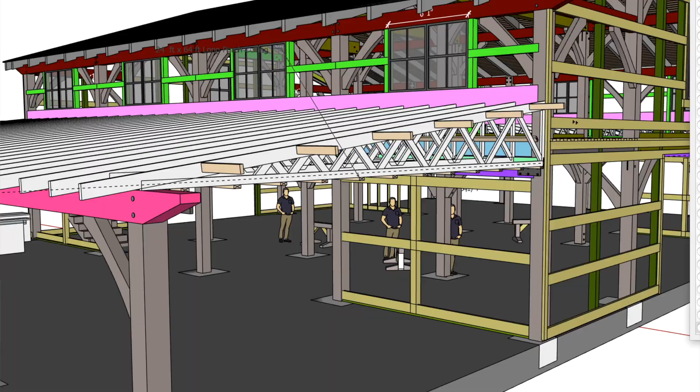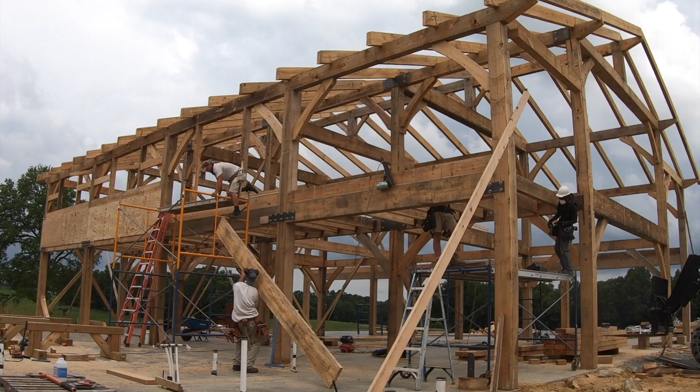Welcome back. We're at the Wedding Barn, and today we are finishing up our loft floor joist framing and working on this window wall so that we can set our trusses next week. If all goes well, we'll be able to set these trusses next week and get a roof on here soon, which we have been looking forward to for 6 weeks now. That's going to be critical. Here we go. Something to be stoked about.

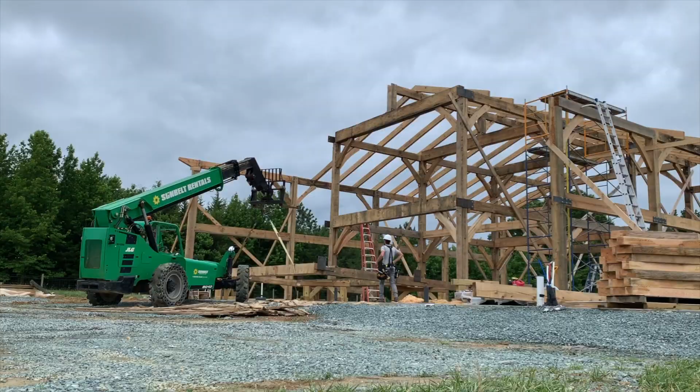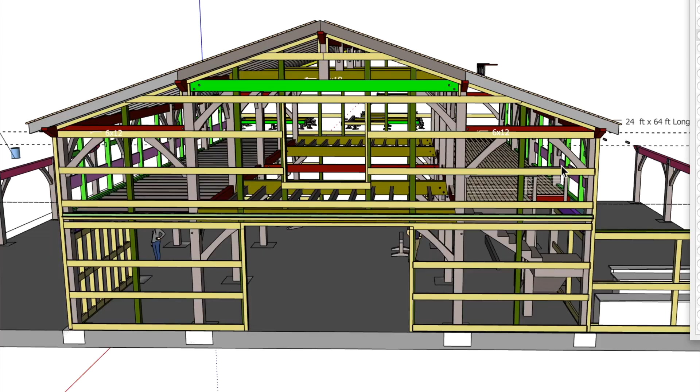So in order to frame this window wall, we've got a bunch of different layers that we got to put on here. So Ben and Blada are working on the floor joist system that the window wall framing sits on top of. And once we have the floor joists in, we can put a 2x6, dimensional 2x6, 1.5 by 5.5 dressed piece of lumber down on top of the floor joist that's going to simulate the tongue and groove decking that's going to go as the finished floor on top of these rough sawn 4x10 floor joists, which we can't put in yet because there's no roof and it cannot get wet.

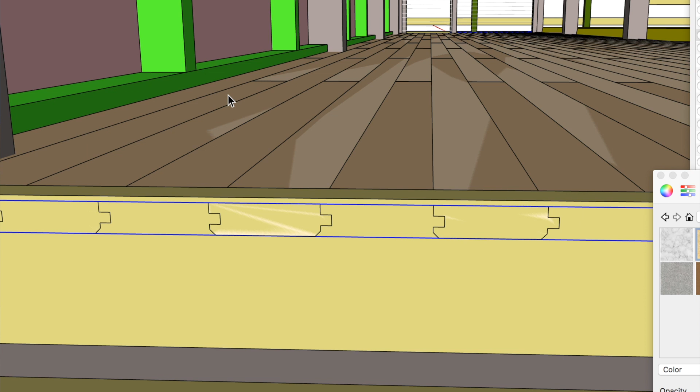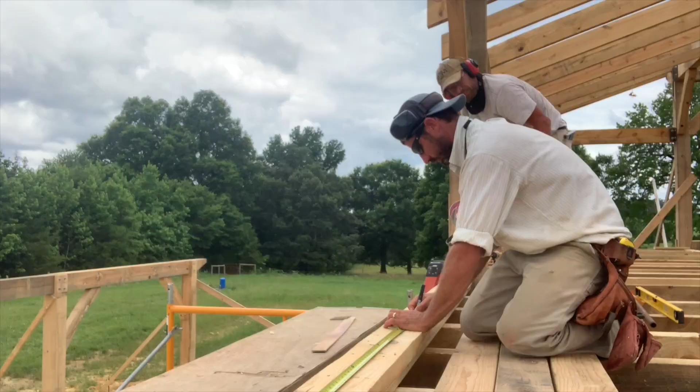And then on top of that is a nominal 2x6 rough sawn 2x6 that's going to be our bottom plate for this window wall. And then once we got that rough sawn 2x6, then we can lay out our window. So we find our center line of our window and we measure half of the rough opening on both sides of that center line to get the layout for our 4x6, which are our window jack studs, our trimmers. Yep. On there. 73.

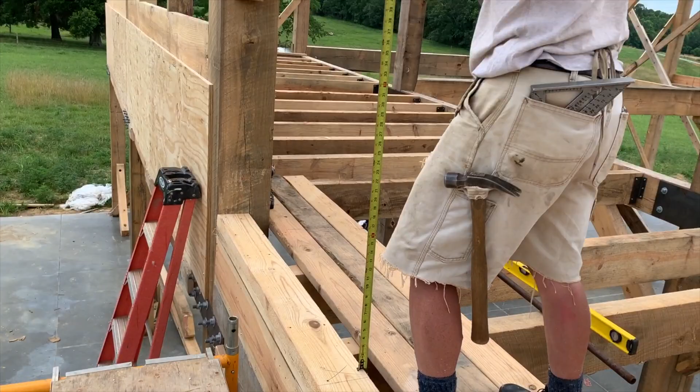And then we go ahead and measure down from the top. All our windows are going to install to the bottom of that 6x12 beam that supports the roof rafters up high. So we pull down 47 5/8. That's our rough opening. And that's where we lay out the notches that go in our 4x6 jack studs, our trimmers that are the sides of the window framing, the rough window framing.

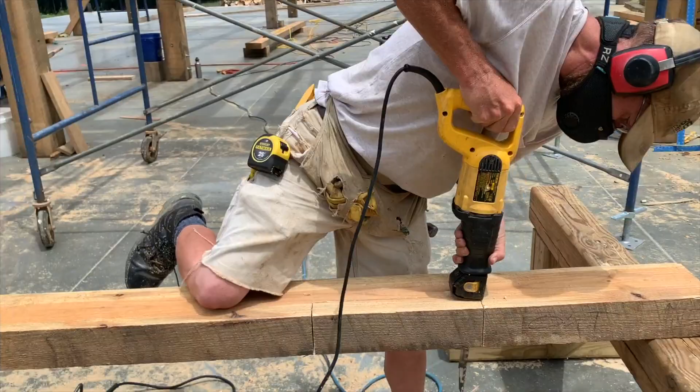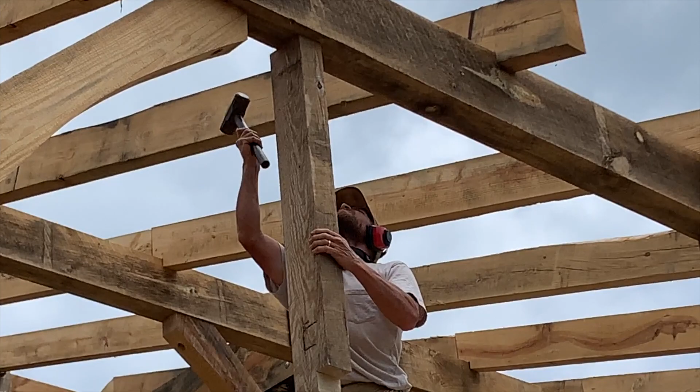And when we cut those notches, we can install those 4x6s, get them nice and plumb and square, and then we can install a 2x14, which serves as the window sill, and it's a 14-inch wide girt sill that goes all the way across, notched butt into the 10x10 posts and notched through each one of the 4x6 window jack studs. It's 14 inches wide because we have some space in between the bottom of the window and the top of the truss.

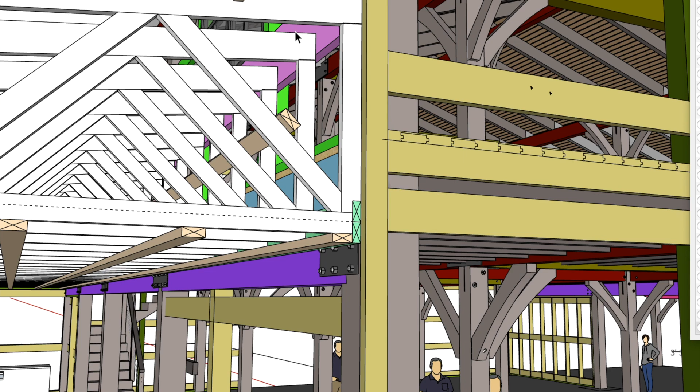And we need to extend it 14 inches down so that we have ample space for nailing the top of the truss. I think we have 4.5 inches of meat of nailing in that 2x14 to nail the top chord of that truss to get a nice positive anchoring. And then we're gonna add a 2x8 up high in between the bearing beam up high and the 2x14 at the bottom of the window.

Since that space is 4 feet, we typically shoot for no more than 3 feet of space between horizontal nailers for our vertical cypress siding. Our wood siding needs no more than 3 feet of space in between each horizontal nailer. So since we have 4 feet, we're just gonna put one mid-span, run it at 2 feet. That's a 2x8 nailer. The next one down is 2x14.

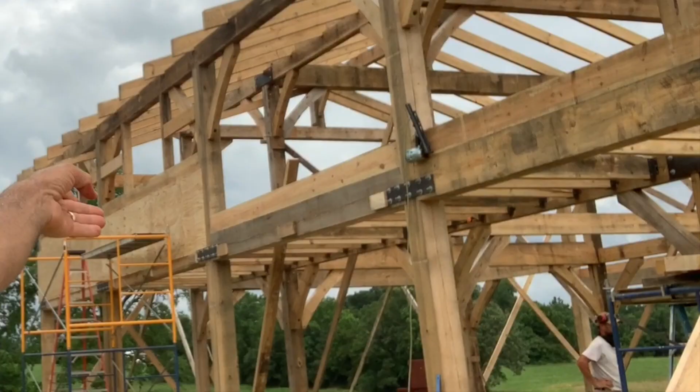As you can see, we have recessed those knee braces in the top window wall 2 inches so that we didn't have to make some weird angled cut when we install our 2x8 nailers. They just go right over top of that knee brace and butt from the post to the window jack stud, trimmer stud, and nail right into that knee brace. That gives it additional support mid-span. And once we get all that installed, then we put up our plywood.

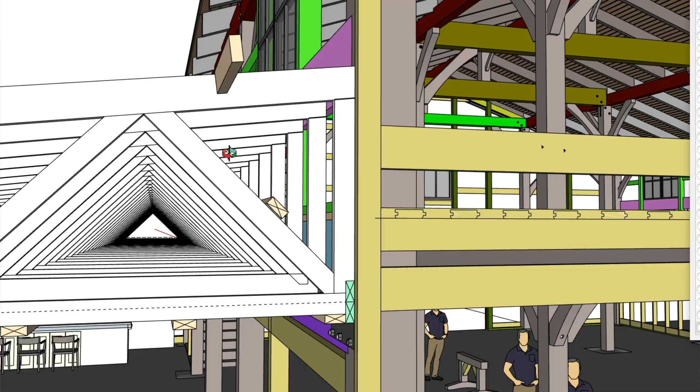We first start by snapping a line 6.5 inches from the bottom of that beam. That's where the bottom of our truss ledger, it's like double 2x4. That's gonna support the truss as it spans across to this bearing beam hanging off of this window wall.

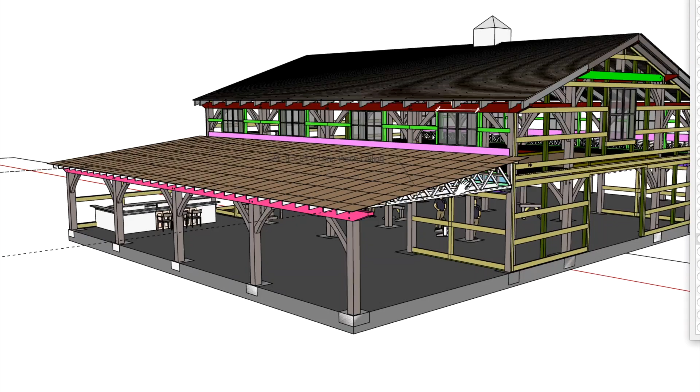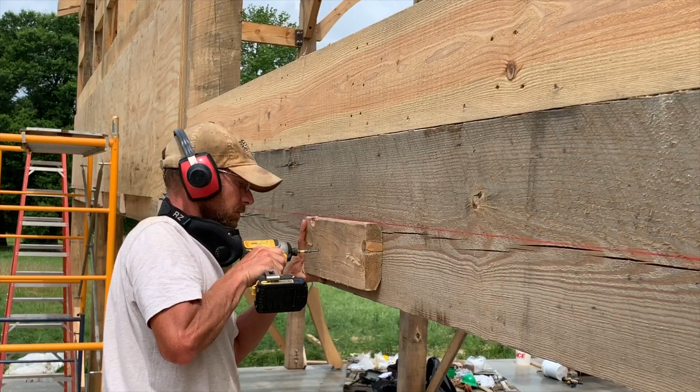In order to tie all of the window wall framing together and build it out to simulate the thickness of that vertical wood siding, we're using a 3/4 inch piece of plywood, and that's what that red chalk line is for. And Mike is putting ledgers in there to support the plywood so that we don't have to hold it while we nail it. We can just set it up on the ledger and nail it off. All right, that's about right.

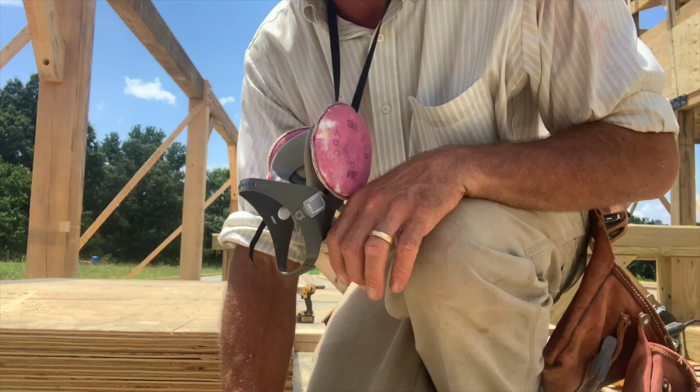We rip our plywood to 3'6". It's not quite a 4-foot sheet of plywood. We can gang rip these. So I screw 4 pieces of plywood together with a 3-inch screw, tighten them all up on the corners, make sure they're nice and flush, and rip all 3 sheets with one cut. And it goes just far enough down that it makes the groove for the next one.

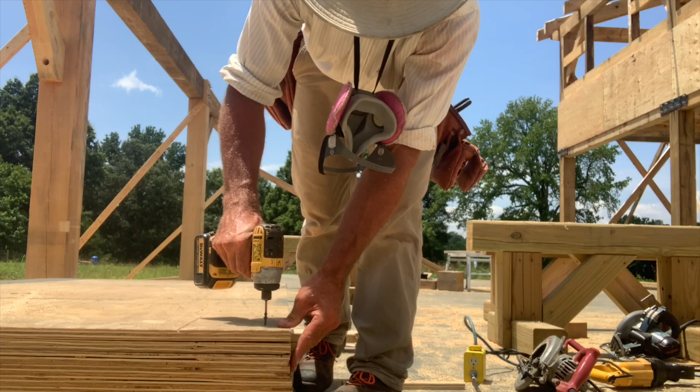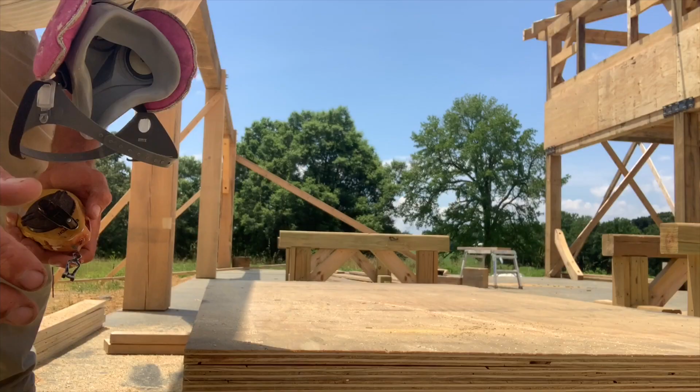As soon as I snap a line for that first cut, I'm cutting 3 pieces of plywood and making a score mark on the 4th one that serves as my cut line for the next 3. So you can really stack your functions here if you think about it, and save yourself a lot of time.

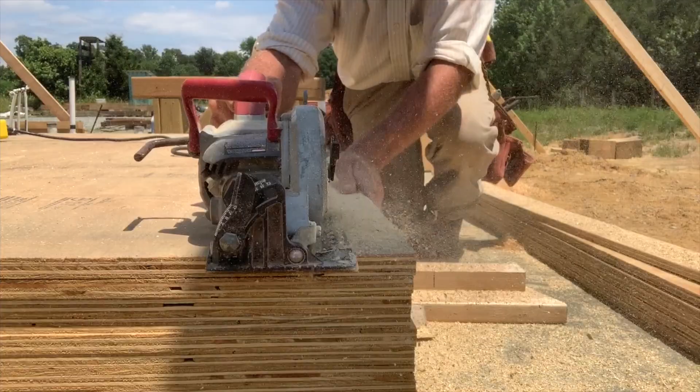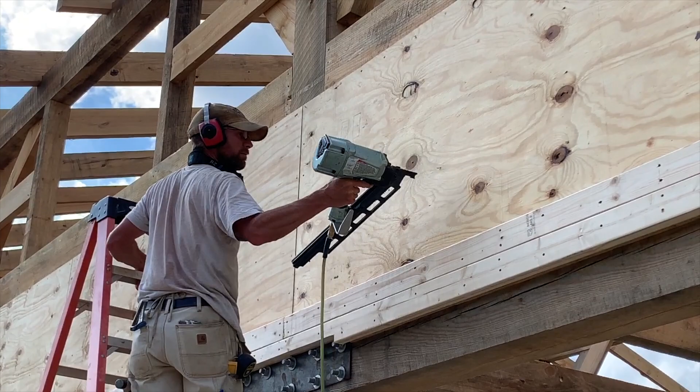And the final step, once we get the 3/4 inch plywood that's going to close off that wall and simulate the thickness of the siding, install the double 2x4 ledger that the trusses will sit on. And we're going to level that over from this beam over to this wall and install them. And then we'll be ready for our trusses.

So if all goes well, we'll have the rest of this window wall framed up. We got our bearing wall here framed up, and we'll be ready to stack trusses on this whole side. So I'm really stoked that we're able to get this all going.